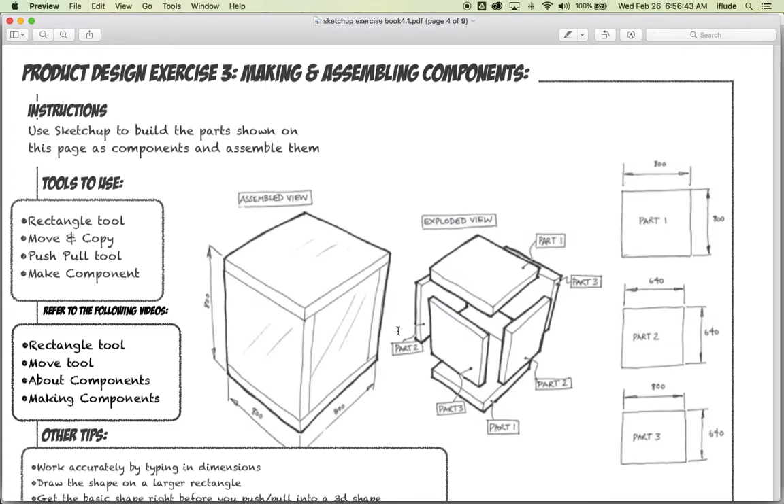So we have here a basic cube, and you can see that it's made of these pieces which fit together. When you see these pieces fitting together, it means you need to use components.

There's a little bit of a mystery to solve here to start with, and the first thing you have to do is work out what the thickness of the pieces is. You have all the information that you need, but it's not given expressly as a specific thickness. So by looking at the sizes of the parts and knowing how big the overall shape is when assembled, you can work out how thick the parts are.

Now I'll leave you to do that and move on to the actual way to do it in SketchUp.

Now, the mistake many students make is that they just make the parts and then try to fit them together. It's actually always better in SketchUp, if you want to make something accurate that fits together, to actually use the part you made before in order to make the next part. When I get to doing this, you'll see exactly what I mean.

So let's move over to SketchUp. You can see this cube is made of a number of squares: 800 by 800, 640 by 640, and then 800 by 640. So let's get that done.

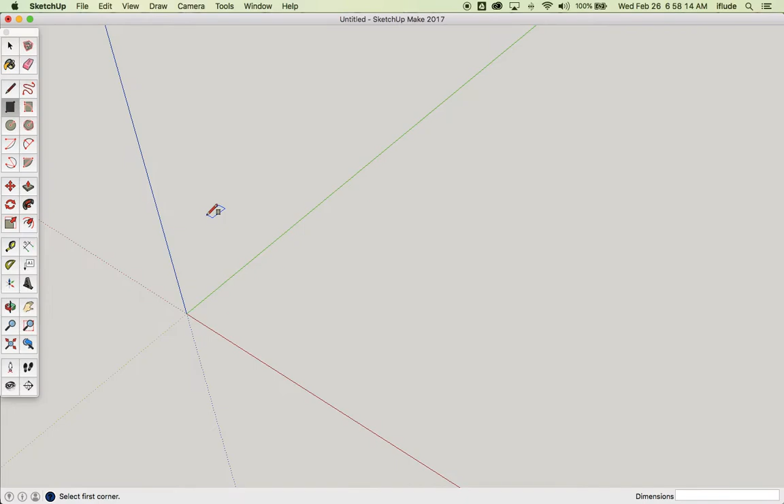So we need to start off with our first square, and that's 800 by 800. That's the base of this square, and of this cube, should I say. And that's then going to be that shape. I've made it accurately by typing my dimensions.

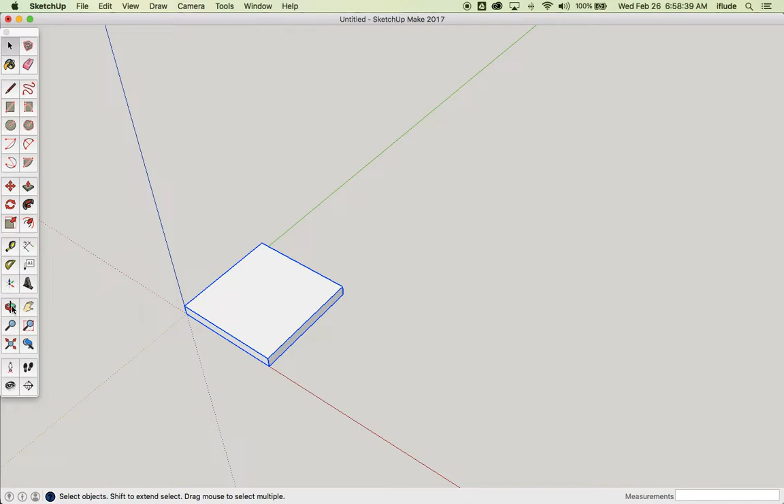And my thickness, and I'm going to start off by making that into a component straight away. Now what that allows me to do is build something directly on it without that thing sticking to it. So what I mean by that is this.

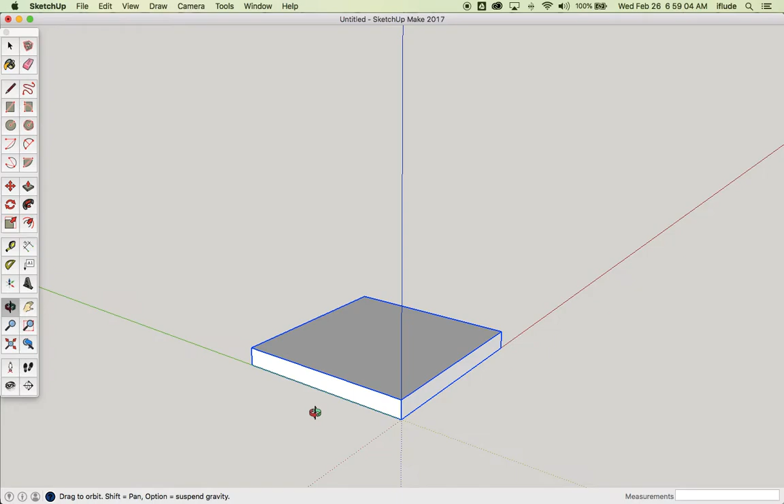I'm going to go back, and this time now I'm going to draw part 3. Now you can see part 3 is here, and it connects at this point. So I know that one side of it is 800 long, and the sides of this square are 800 long, so I can use that to guide me when I'm drawing.

So start at this corner, move to that line, and then you can see down the bottom I've got my dimensions. One is 800, and I know that the other one needs to be 80. And now I have this square. It's drawn on the component, but it's not part of the component, so it is still a separate entity.

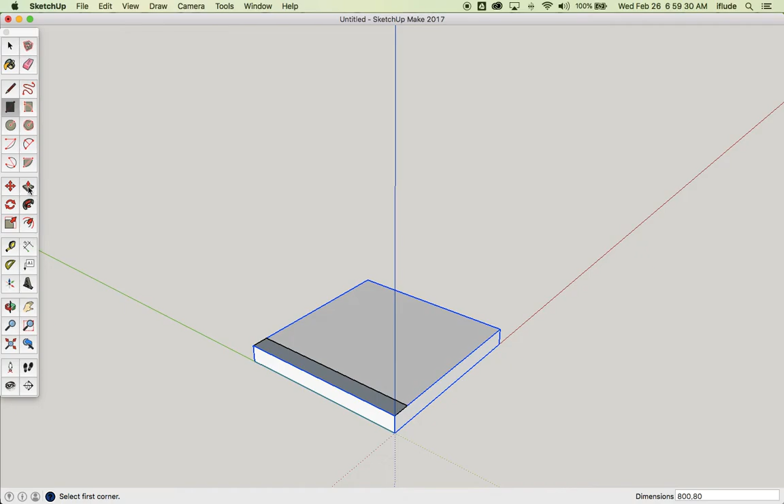Go back, and I know that my height needs to be 640. Triple click, make that into a component.

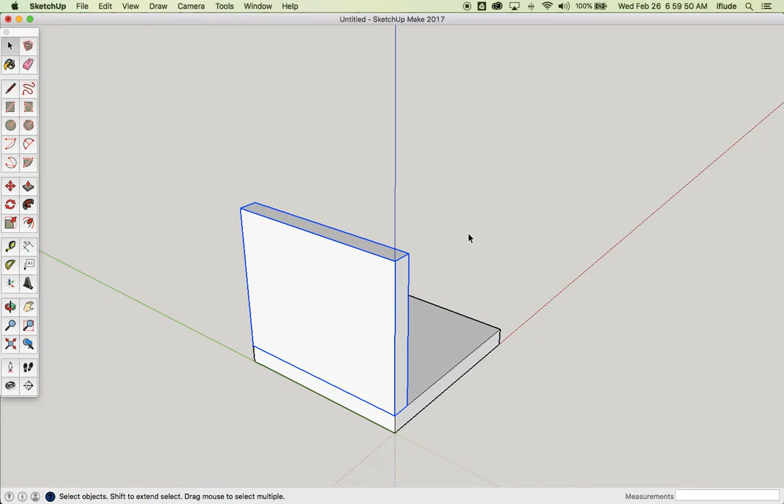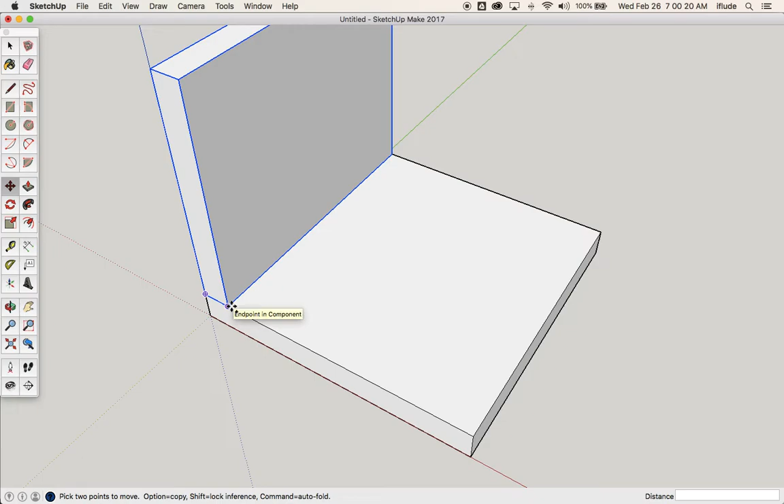And now I'm going to use a trick that we know already, and that is to move something and make a copy of it at the same time. I want another copy of this over here in exactly this position, and I know where it needs to go. The point I'm going to snap on is I'm going to move this and make it snap to here. So hit the Option key on my keyboard with my move tool, that gives me my plus sign on my cursor, and then I can drag across over here until that snaps onto there.

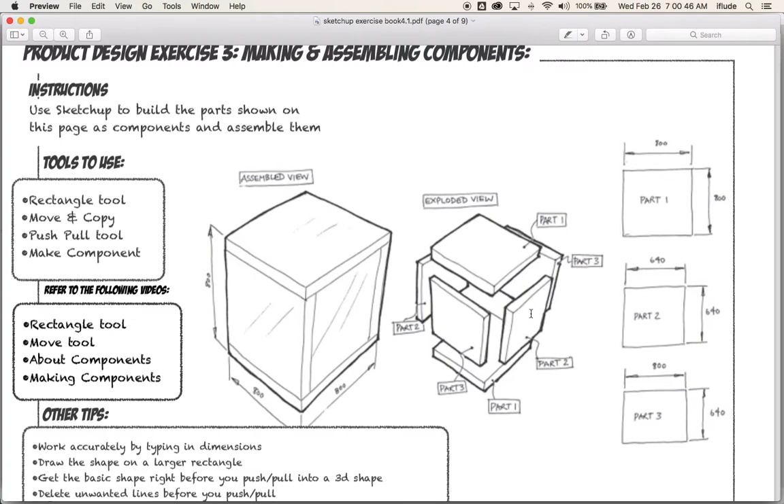That is 2 sides of my box already made. Now, if I go back to my sketch, I can now draw part 2, because part 2 is this one. I can now draw part 2 because I have a way of drawing that without even typing dimensions.

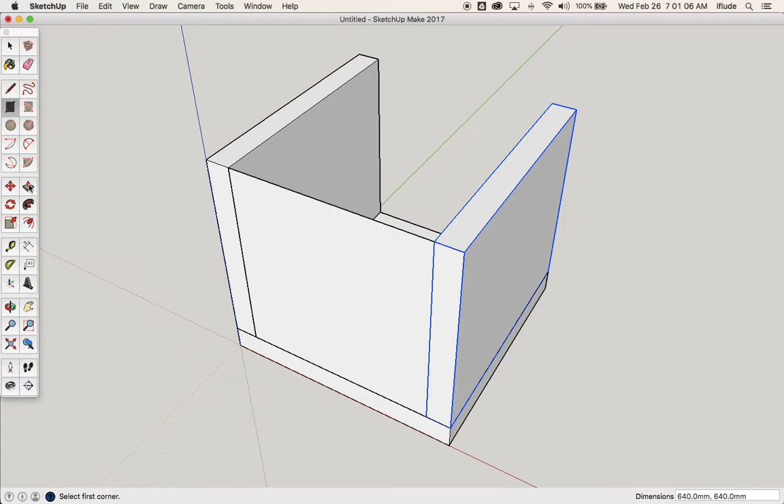So let's go back, and if I take my rectangle tool and draw a square from this point here across to this point here, it snaps, and I know for sure that that's the correct dimensions because all the parts I'm using as a reference are in the correct dimensions. So I know my thickness, and I'm going to now click and make that into a component again.

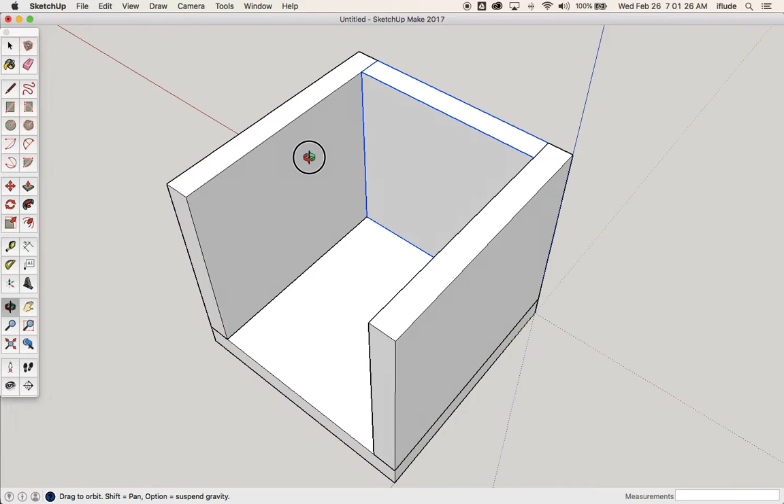And now I don't need to do any more drawing because I have all the parts that I need. I can take the part that I literally just made. It's already selected, so I'll just take my move tool, hit the Option key, you see my plus sign appears, and I'm going to now make a copy, drag it across, snap it onto that point there.

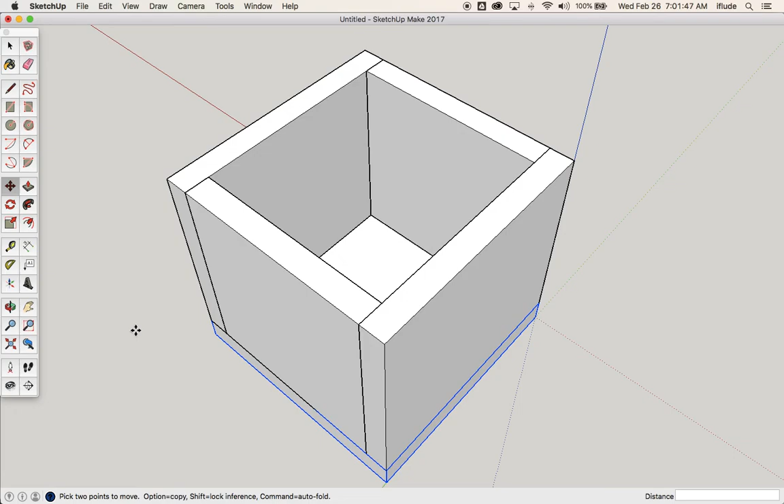And my final piece is taking a copy of the bottom, doing the same thing with the Option key, making a copy and snapping it onto there. And that is the easiest way to draw this challenge.